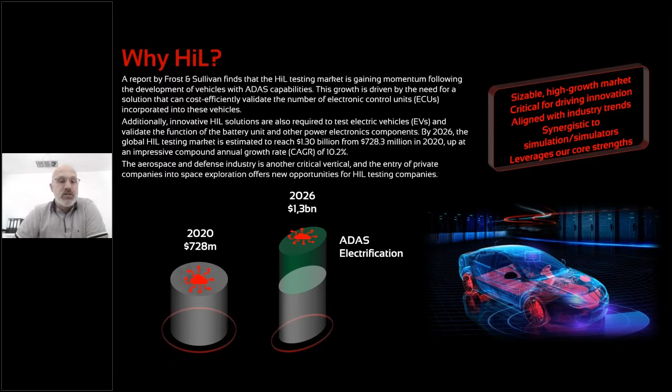Initially, VI-grade is focusing on three main application areas, and you will see more and more solutions developed in the area of chassis engineering, including steering systems, passive and active suspension components, brake systems, and all its associated controllers.

We will also look at the area of advanced driver assist systems, with particular attention on sensors such as cameras, radar, LiDAR, etc. And thirdly, we will look at the area of powertrain, and here in particular regarding the electrification.

Let me point out that in particular the electrification has impact on the rest of the vehicle, as you are all aware, with respect, for example, to steering system and brake systems, for energy recuperation as one example.

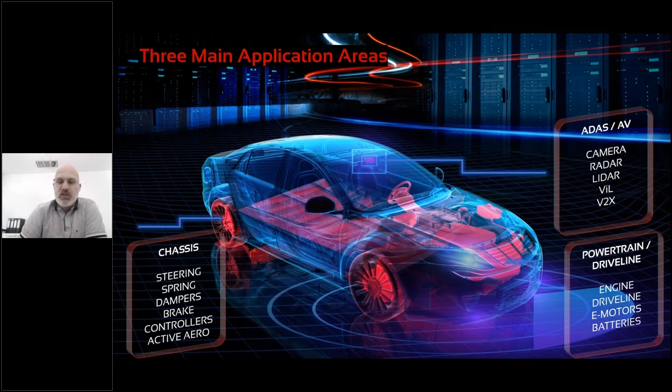All that results in a need for more complex models, where all these models are put together and running either in real time, as model in the loop, software in the loop, hardware in the loop, human in the loop, or a combination of all of that. So complexity is increasing for the simulation and the tasks we have in front of us.

What is our vision? The vision is to have an integrated virtual test approach. Hardware in the loop solutions are an essential part of it. Applications allow our customers throughout the development cycle to decrease the number of physical prototypes and to achieve virtual sign-off.

During product development, controllers and hardware components become available and need to be included in simulator testing activities. Let me pause here for a second. It is based on our experience often the case that during the development, the software in the loop solution, which is often preferred, and we're coming with a strong simulation background, is not feasible

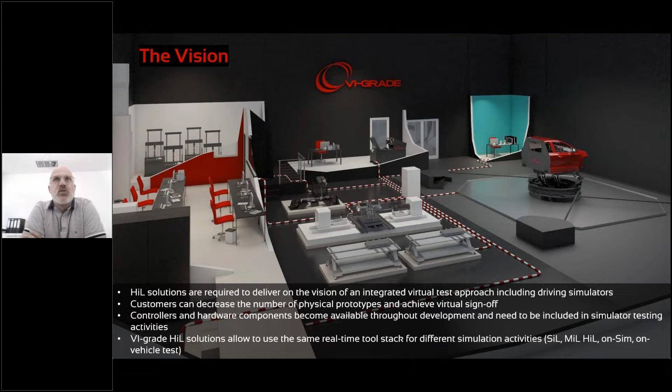because you may work with a third-party supplier who's not willing to open up his IP to you, and the only way to get an overall accurate model description is by including a controller as it is available in the real car on an ECU. So in some cases, in order to get overall accurate results, we have sometimes no other solution than including the ECU early on in the process.

And that is where we believe having a consistent way throughout the development process is an added feature of our solution. So VI-grade HiL solutions enable customers to use the same real-time tool stack for different simulation activities like software in the loop, model in the loop, hardware in the loop, on the simulator, on vehicle testing, for example. Now, I'm proud to introduce AutoHawk powered by Concurrent Real-Time to you.

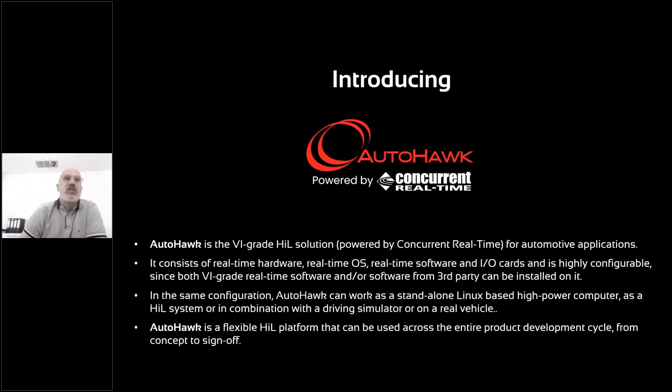Let me start out with some solution highlights. AutoHawk hardware is based on commercial off-the-shelf components, thus allowing to take advantage of the latest chip developments in the market at an attractive price point. Of course, that's valid for I/O cards and other components as well.

The leading real-time operating system is based on Linux and provides an open architecture which makes the integration of your custom solution as well as third-party products from software to special I/O boards much easier.

But probably one of the most attractive details is the multi-core technology that provides for more computational power and allows you to run more complex models and controllers all in one system, avoiding problems related to operating a network of less powerful real-time systems.

Simulation Workbench provides the platform to integrate the models, so the solution does not really require Simulink. However, another highlight of the solution is that it's tightly integrated with Simulink, such that you can run it directly on the real-time system without the need to transfer code from a client to a host file system.

Of course, common automotive communication protocols are supported, such as CAN, CAN-FD, LIN, and a number of others. AutoHawk supports the VI certified ecosystem. So in other words, you can run a lot of third-party products on our system that are certified, and we're trying to make sure with our partners that you can rely on the quality of these components running on AutoHawk.

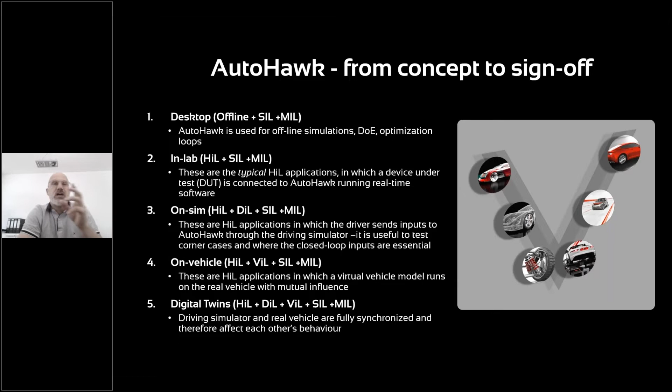Now let's go and look at on-vehicle testing. These are HiL applications where virtual vehicle models run on the real vehicle with mutual influence. What are the benefits? The virtual vehicle on AutoHawk runs about 5 times faster than real-time, can provide inputs for the real controller. The real controller can also be fed with a combination of real-time channels coming from both vehicles. So in other words, from the virtual vehicle, used in a predictive manner, as well as the real vehicle coming from actual measured sensors. All that opens up the door for totally new possibilities of controllers. And lastly, you can also use it for the digital twin application, where the driving simulator and real vehicle are fully synchronized and they affect each other.

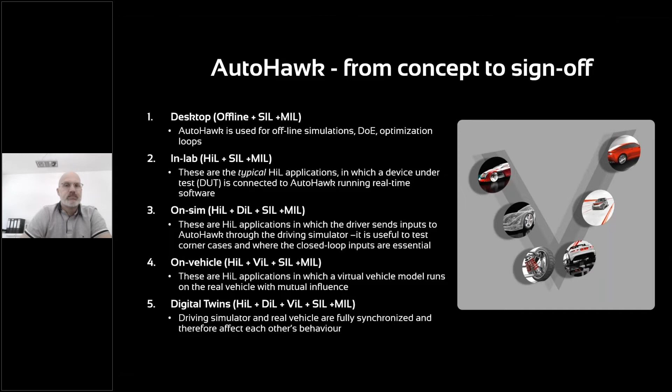AutoHawk comes in 3 standard configurations with 8, 16 and 24 cores. It is equipped with a 2 terabyte SSD hard disk to manage your projects and log data. One could say you have a pretty powerful data logging tool also at hand when you get an AutoHawk system. All systems come with a communication card that supports CAN, CAN-FD and LIN out of the box. AutoHawk runs with a Linux-based RedHawk operating system and Simulation Workbench. And for on-vehicle applications, the systems are also available in rugged chassis.

The systems are highly configurable and provide 4 to 7 slots to include boards for I/O, the most versatile being freely programmable FPGA boards. Of course, you can also include an expansion chassis for signal conditioning and fault insertion, along with a programmable power supply, as you can see here on the top right.

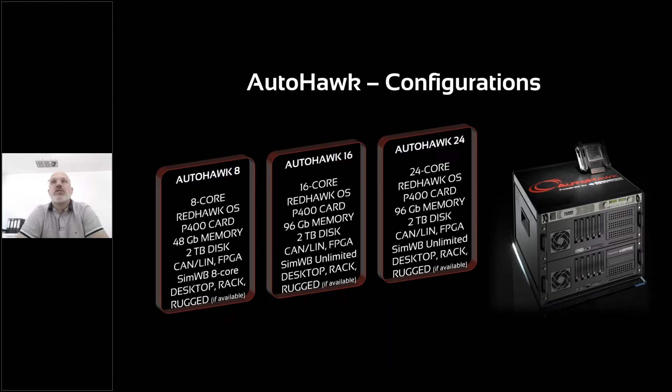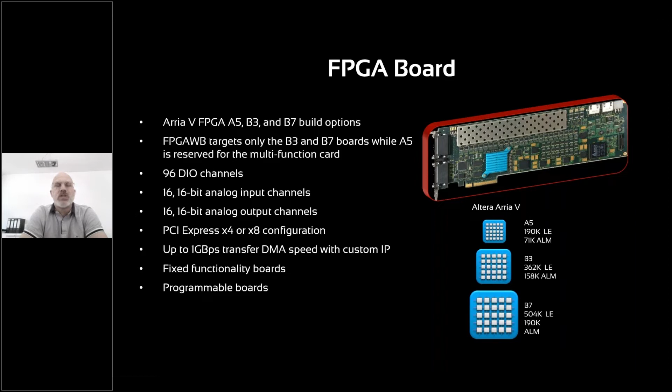And we have a number of fixed functionality boards, as mentioned before, but also freely programmable boards. In order to make it easy to take advantage of this technology, a number of predefined IP core modules are defined and available. In those cases, this FPGA board is already pre-configured to deliver particular solutions. For example, for ignition injection, or for a SENT in/out, or NOx sensor as one example, or in a more generic way for the electric drive with models for inverters, for motors and controllers.

And perhaps at this point I should highlight one option, that is the capability of including a JMAG-RT model in the system, and that is, as far as we know, a unique offering in the world right now that you can get out of the box.

The generic FPGA Workbench architecture looks like this. You have either the capability to freely define your own capability on the FPGA card using FPGA Workbench. In that case, you will use your own compiler that we also provide, which is the Intel Altera Quartus Prime system, which is required to generate the code for the actual FPGA card. And also running on the AutoHawk system are the predefined capabilities that I listed before. They are fully integrated in Simulation Workbench, where you then only have to set parameters and configure these sensors and I/O characteristics for these modules, or you can run them through custom applications.

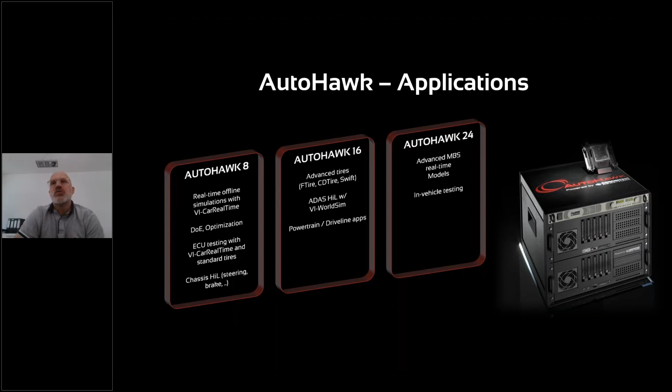And for the high-end applications, we have an AutoHawk with 24 cores. That is needed, for example, when running advanced explicit multi-body simulation models, like Simpack or Adams Real-Time, and it is used for special applications, for instance, in vehicle testing.

AutoHawk in general consists of a layer of hardware, which is essentially the well-proven real-time system from Concurrent that is also running in all our simulators, as mentioned before. It comes with software including VI-DriveSim, with the vehicle model and virtual driver in VI-CarRealTime, and the virtual sensors, environment, traffic, and scenarios in VI-WorldSim. Of course, running third-party software and extending systems through the FMU interface is possible. All that is integrated with Simulation Workbench and its real-time database.

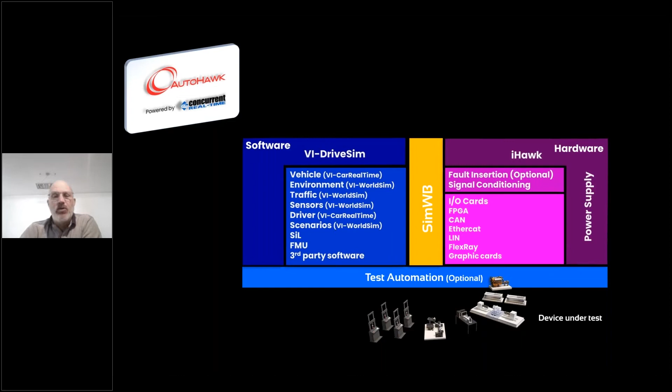Users may choose to automate testing using either the Simulation Workbench scripting capabilities or connecting it with the existing test automation tools through the available APIs that I mentioned before. The device under test is then connected through available communication protocols such as CAN or through the customer's specific I/O boards. And in order to get the human in the loop, the system can be integrated with a simulator, which provides great value, for example, for defining and testing corner cases.

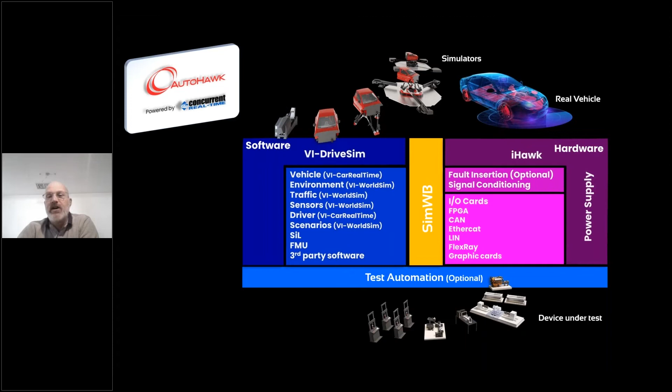Now let me introduce to you the concept along a simple demonstrator. The scenario is the following: the development, functionality validation, and subsequently calibration of a stability controller.

This demonstrates how a system like this can be used to get the controller better prepared before connecting it with a simulator, or even before going on the track with a real vehicle. Let me describe the general workflow: first we develop a normal vehicle model and set up the maneuver in Car Real-Time. We create a control system, design a controller, then do initial software-in-the-loop testing in a more traditional way, using co-simulation between Car Real-Time and MATLAB. In the last step, we integrate the actual ECU with Simulation Workbench on AutoHawk.

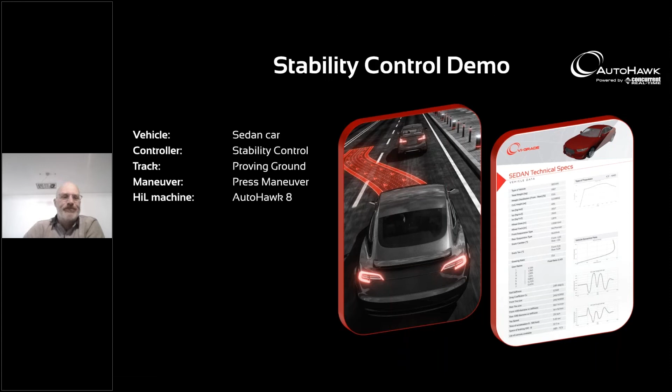What are the steps we need? We're using the proving ground of VI WorldSim. The maneuver is a simple lane change maneuver, often referred to as a press maneuver because it's used to rank cars based on the quickest time against the competition in the auto press.

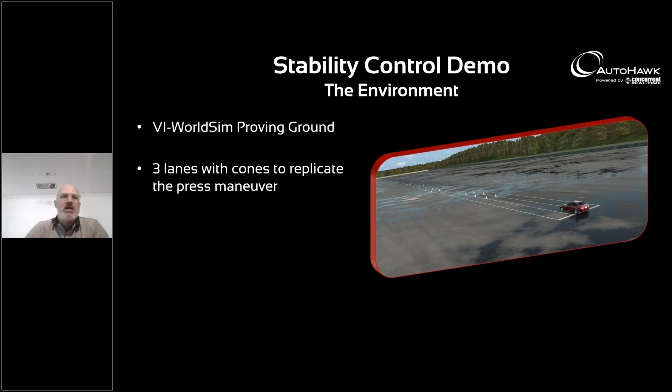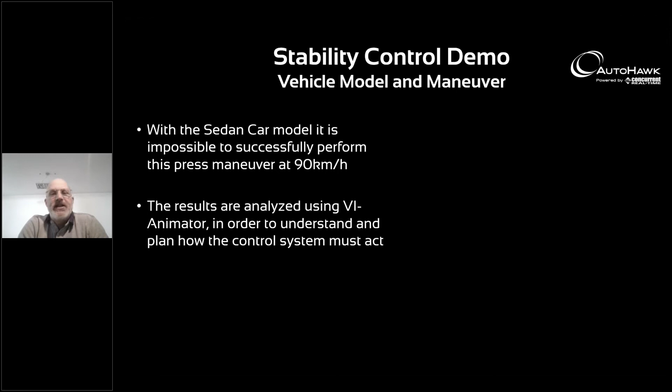We're using, in that particular case, a standard vehicle, and we perform the lane change at 90 kilometers per hour. With a passive car, it is impossible to pass the test, and by reviewing results like yaw angle, rate, or steering angle, we can start developing an idea of what a controller should look like.

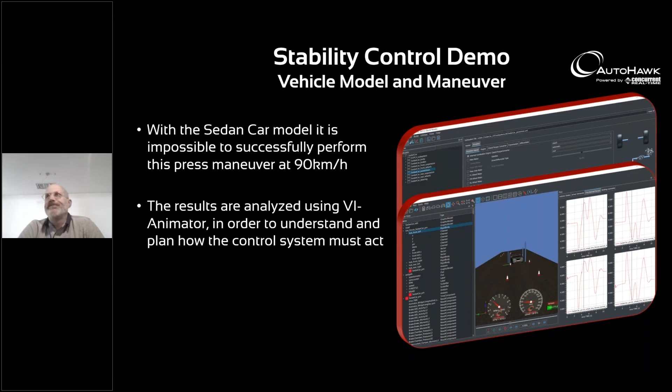The controller is very simple, acting on the brakes just for demonstration purposes. It uses vehicle speed, driver steering demand, and yaw rate as inputs, and acts on the brake pressure. In real life, this would be more complex, with additional sensor data like wheel speed feeding in, but for demonstration purposes we tried to keep it simple.

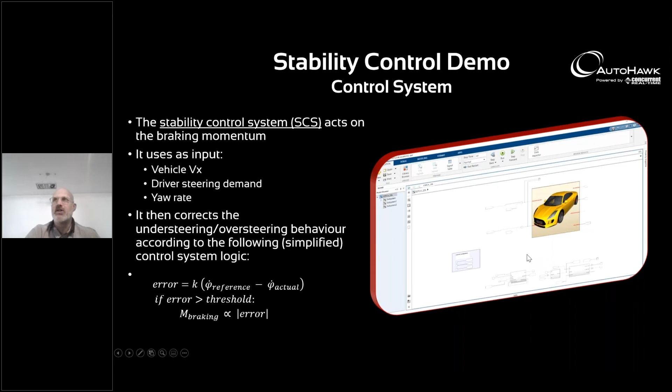Using the traditional software-in-the-loop method, the control system can be tuned using VI Car Real-Time together with Simulink and its contained DOE and optimization methods. Up to this point, you can do that work on your normal Windows PC - that's standard offline - or already at this point take advantage of the high performance compute power of the AutoHawk system, moving everything onto the AutoHawk and thus shortening the experiment cycle.

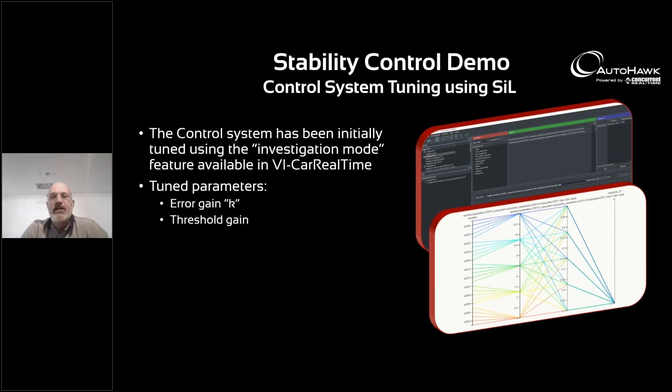Now we move to the AutoHawk system and set up a VI-DriveSim session. The maneuver is performed on a wet surface that has to be defined in order to allow users to interactively tune the system. We have also included a little dashboard on a touch screen using our VI dashboard tool.

You may also use the HMI capabilities that come with Sim Workbench. In this particular case, on this little screen you can see here on the right - that's the little dashboard - you get a collision warning sign, for example, if there's a collision occurring.

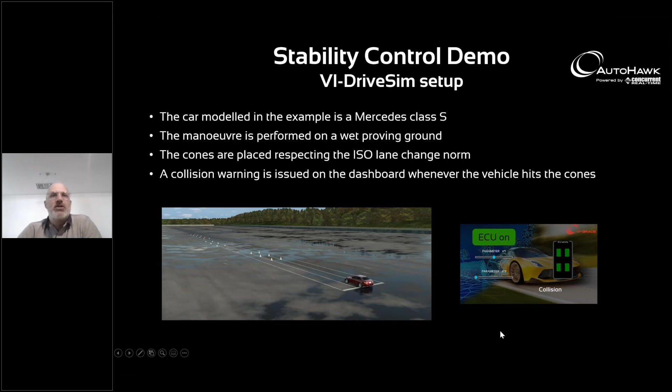So what does the HiL machine look like right now? It's an AutoHawk 8 system. We have in that particular case also included the Windows PC in order to visualize a little bit more. But in that spot, you could easily imagine that an expansion chassis would be fitted there for signal conditioning or fault insertion.

We have used a programmable off-the-shelf ECU that allows us to run any kind of controller, from an eDrive controller to a vehicle dynamic controller on it. In this demo, we use an ESP kind of controller.

Then the programmable AutoHawk power supply is connected with the ECU, and in that case just provides 12 volts, but can be used also for interrupts, etc. The messages are exchanged between the ECU and the AutoHawk via a CAN bus. The control system will take inputs from the AutoHawk and send back control signals. The control signals in this case are the brake moments.

And what we have done here is we even hooked up, as I mentioned before, this thing to the dashboard. So while the simulations are running, you can interactively change parameters in the controller during the simulation.

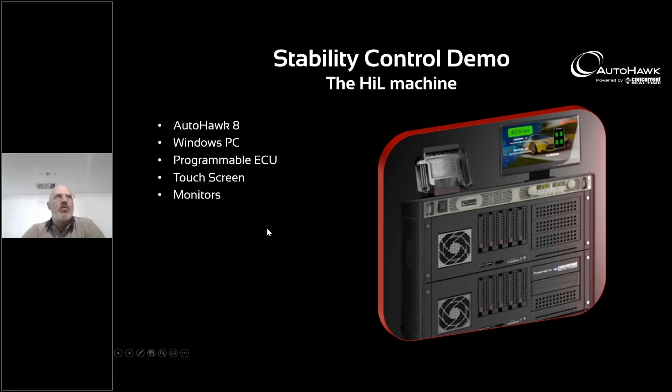So what is really needed for that? What is contained in such a project? If you set up a simulation workbench session, kind of an integration layer, you have always a combination of scripts, models, and a so-called real-time database into a full simulation.

In this particular example, I will show you a couple of snapshots later. We have 3 processes running on different CPUs: one VI-CarRealTime for the vehicle model, one process running the dashboard, and one process running the world environment.

The test session, in each test session, simulation parameters must be specified, for example, maximum overruns, consecutive overruns, etc. These are generic kind of parameters that you need to set up your session.

It always has to include a so-called real-time database. That's a collection of I/O points which can hold numeric, Boolean, or string values. Essentially, it's a mapping of these points to hardware registers or message fields. It has optional conversion functions that convert between the raw hardware values and the engineering units of the I/O point.

Lastly, you may include scripts. In that case, we are using a script to automatically reset and automatically rerun the simulation at each end of the path.

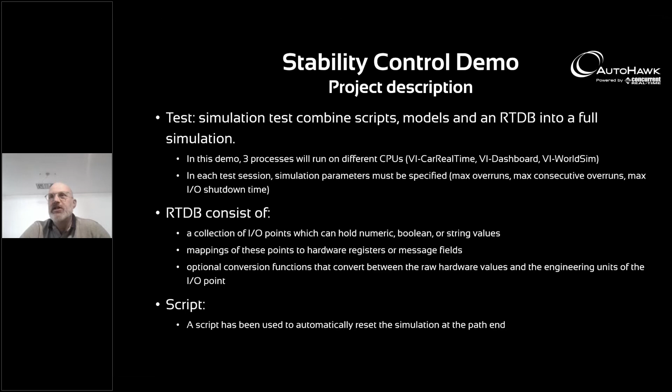Here you see a typical snapshot of a sim workbench session. One thing I would like to highlight here is that, of course, as you set up your test session, there's a capability to import DBC files, so the normal way of defining your CAN bus. There are a number of tools available to do that and to make it convenient for you.

Like I mentioned before, also in sim workbench, you may use its own HMI sim workbench tool or VI-Dashboard. I only put this up here to give you an idea about the interactive solution that comes with the application. On the left-hand side, you have a tree view through which you can navigate. You have a test area here, the real-time database as you define it, scripts, and the different types of models and some more capabilities.

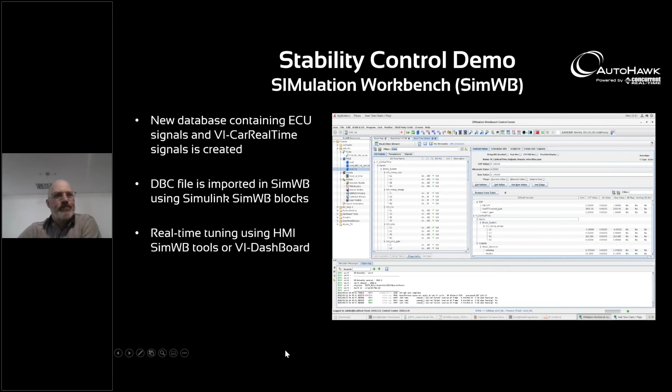As mentioned before, you have to define the different processes and models. In this case, for instance, we have 3 of these processes and models for car real-time. You can see it's located on CPU number 2. We have the dashboard running on CPU number 4, and we have WorldSim running on CPU number 3. That's a typical example. There can be many more processes that you can manage that way.

Of course, you have the real-time database defined and the scripts again here on the left-hand side. Those are the ones that make up a test.

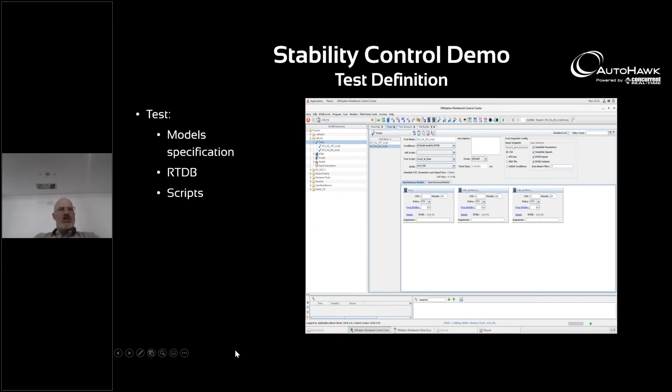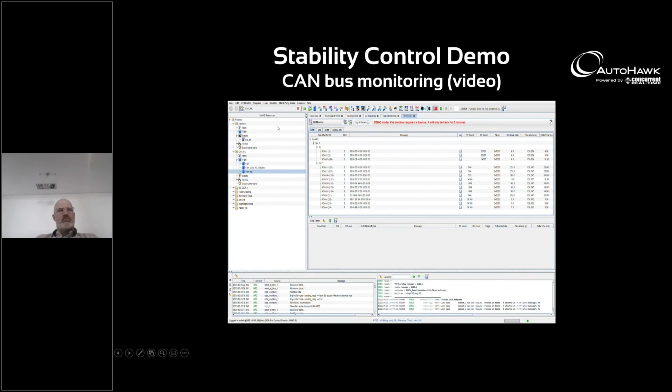The real-time database, to dive a little bit deeper into that, as I mentioned before, acts like a bus system if you want. It's a mapping capability, and of course the user can set up communication with the RTDB, so with the different real-time database entries via a number of protocols, including CAN, CANFD, LIN, but also EtherCAT or other protocols in that domain.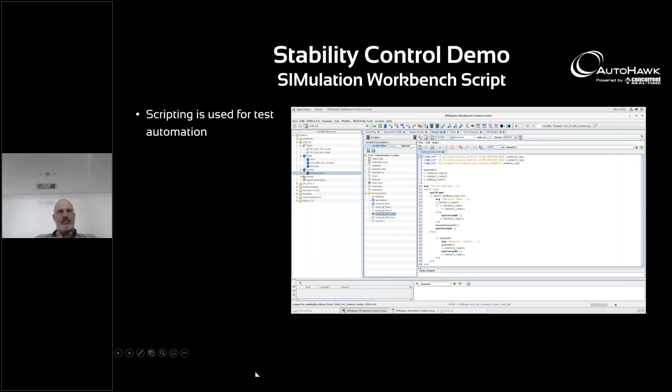Here I would like to give you an example of how the system signals are looking. We're looking here at the throttle, the yaw rate, and the steering effort or steering demand. In this particular case, initially you see the curves for the system or for the maneuver being driven without the controller being active. I let it run here for a little bit.

Of course, that is something you can monitor live while the system is running, and you can monitor these signals all the time. Then once the system is turned on, you can see the steering effort and the yaw rate is dramatically reduced. And that shows you the functionality in that particular case of the controller acting on the vehicle.

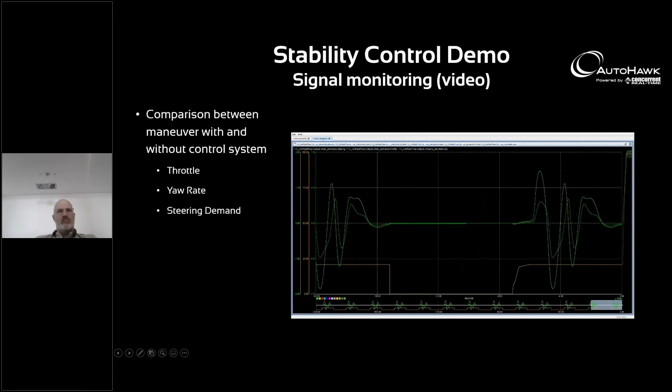So here you see a summary from the perspective of looking through the car. And here on the right hand side, that's the dashboard we talked about, where you can turn on and off the controller and see how the vehicle is then basically not able to pass without hitting the cones.

And if you turn on the ECU, you can start interactively tuning the different parameters. So the intensity gain can be used to tune the intensity and invasivity of the control system. And the number 2 parameter is there, in some sense, to let the control system delay its intervention.

On the right hand side, of course, you can see how the controller is acting on the brakes. And this is a nice way also if you want to have other people see it. So there you saw some collision occurred. This is a good way of tuning the system in a very interactive way before, for example, going on a test track.

So we believe with the accuracy of the vehicle models, including advanced tire models, you're getting much closer to a calibration of the system prior to applying it on the test track or in the vehicle on the track.

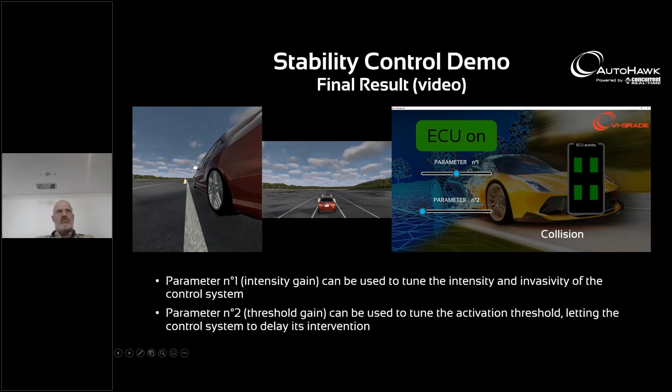Let's look at some other use cases, and I will just touch on that on a high level.

So one use case would be where the AutoHawk is connected to a steering rig, and then it is ultimately connected to a driving simulator. What are typical applications? Well, steering system integration, of course, EPS calibration, steering feel, it's very sensitive, of course, fault injection, benchmarking, X-by-wire redundancy validation, or generic ADAS development.

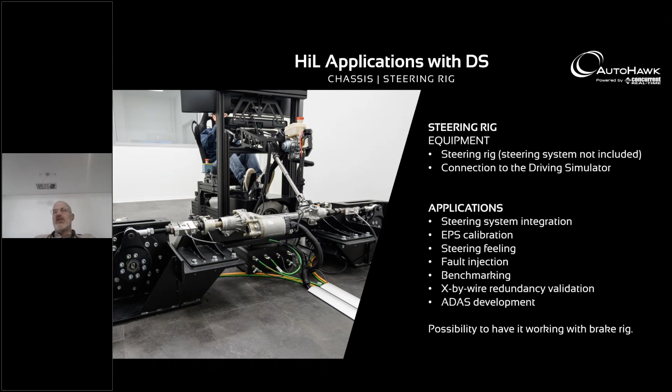In fact, this rig has been also combined with a brake rig in the lab. Or it could be used for very complex HiL cockpits to be developed.

In that particular case, we developed a solution that contained not only one bus, but 3 CAN bus and 1 FlexRay bus system, if I remember correctly. It had not only one ECU connected, but I think 10 for different domains, from chassis to comfort or ADAS type of systems, all the way to ECUs controlling, for example, the ambient light. In that particular case, a wheel speed sensor was also included.

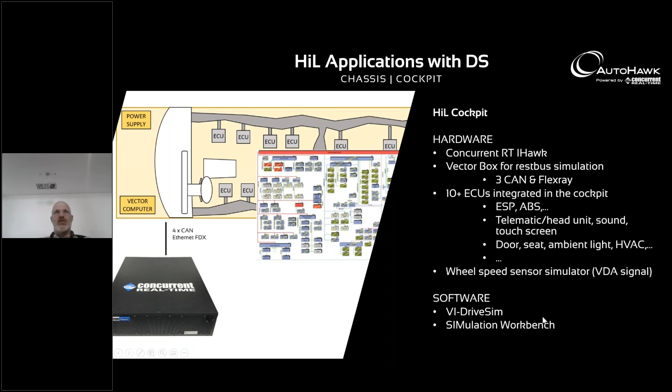Perhaps something to point out: although Sim Workbench is fully capable of providing rest bus simulation, with capabilities to define what is running on your CAN bus, you can also include third-party solutions that are commonly used, from Vector for example, to take care of the rest bus simulation. In that case, the software we used also included VI DriveSim and Simulation Workbench.

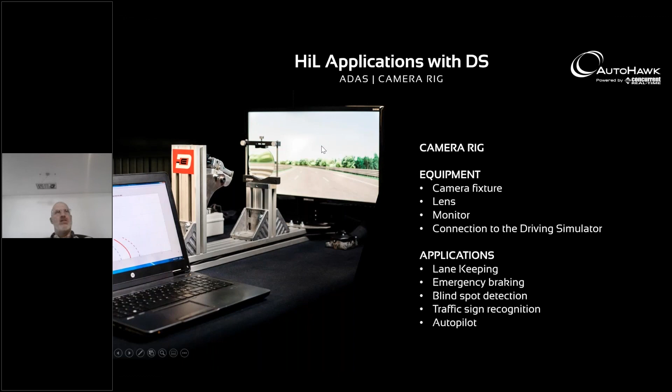Or just to give you another example, a little camera rig where there was a camera fixture included with lens, monitor, and also here in this case we connected with a driving simulator. So what are the applications? Lane keeping, emergency braking, blind spot detection, traffic sign recognition, autopilot. Whatever you can imagine can be done with a camera, this can be done with such a system as well, in combination with VI WorldSim used to simulate the complex traffic scenarios as an example.

And then in powertrain, I picked an example that's a little bit out of the ordinary, a pretty extreme case. This was a very complex system which was very powerful, but the highlight of this specialty is that it was even put into a rugged chassis or box space, a rack, that was possible to take onto the vehicle. I can't say more about these specific cases, but on generic terms, it was used for fault insertion and engine control development.

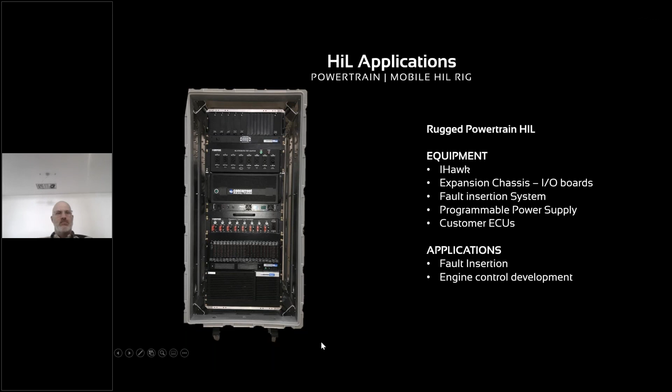At this point, I would like to conclude my presentation. HiL applications complement offline and driving simulator activities and help to achieve virtual sign-off. The demand for HiL applications is expected to grow significantly in the next 5 years.